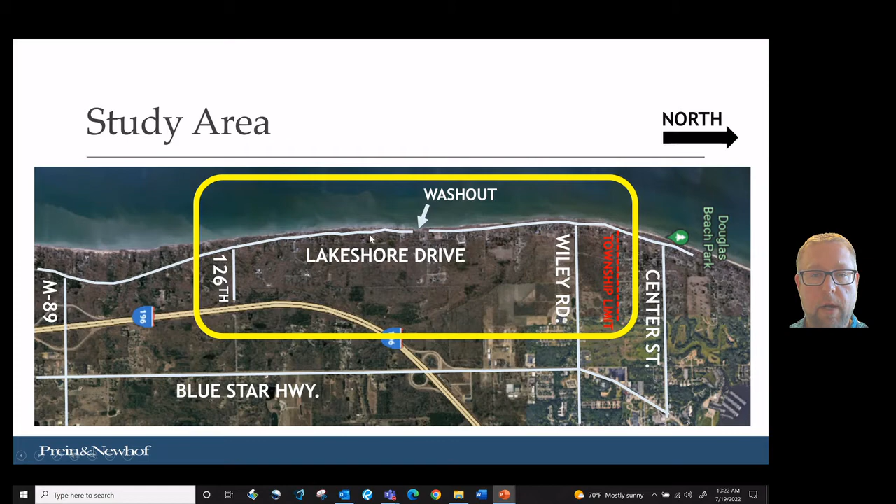This has created a dead-end road in two directions, so folks who access their property from Wiley Road heading south have limited access going in or out. Our study area for this feasibility study goes from the township limit on the north end to 126th Avenue on the south end. It encompasses both sections of dead-end roadway and the area of the 1986 washout.

What to expect today: we're going to give a presentation followed by input opportunities. We're going to go over existing conditions. We've reviewed the bluff face and the location of the road and how close it is to the bluff in several locations, and we're going to present a snapshot of what the roadway and the bluff look like today.

We're going to discuss the risk to the road, the relative risk of a bluff failure impacting the road. We're going to look at some management strategies that the Road Commission can employ to manage long-term access along Lakeshore Drive. We have four options that we're going to focus on and present, and then we're going to ask for input from everyone in a discussion of the trade-offs. A lot of the options we present today have trade-offs that folks will need to consider, and we need everybody's feedback to help guide future decision-making for the roadway.

In terms of a long-term management strategy, where we are today is in the understand the problems and issues and assess the risks phase. There's no proposed project at this point. We need to develop what those alternatives would be, and then the next phase would be to implement those. So today we're focusing on communicating the risks, exploring alternatives, and seeking public input on those alternatives.

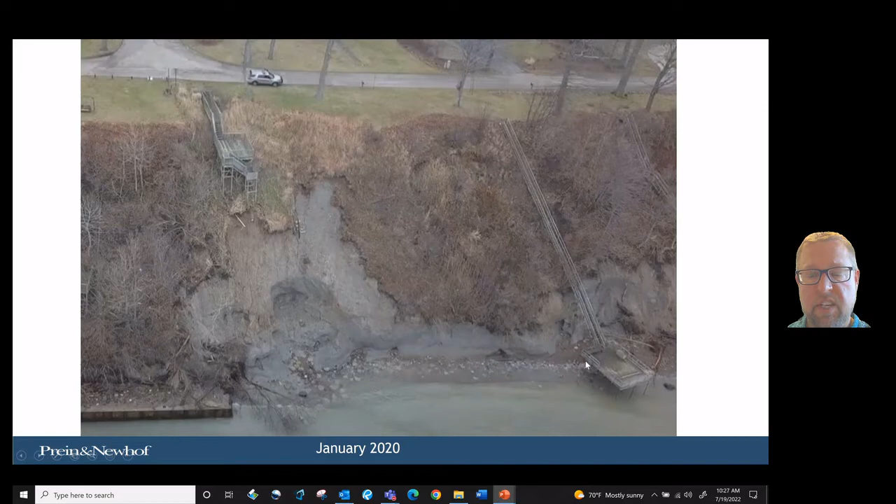So we'd like to talk a minute about coastal dynamics and erosion. First of all, this is a very complex system. The lake levels go up and down and are constantly changing the condition at the toe. When there's extreme wave action, especially in late fall and winter, a lot of erosion can occur at the bottom, or the toe, of the slope. This figure is from an Army Corps of Engineers document called Living on the Coast. It shows a lot of the factors involved with slope stability when infrastructure such as homes or roadways are located on top of a bluff.

The lake level goes up and down, as we know, and we'll show you a historical graph of that in a second. Historically the lake swings about 6 feet in either direction from high to low, and has over the last 100 years of record. Recently there's been a high water period where near-maximum levels were reached, causing a lot of erosion at the toe, as you saw in the previous pictures. In the future, the U.S. Army Corps of Engineers is working on a Great Lakes coastal resiliency study to help understand long-term trends related to lake level change.

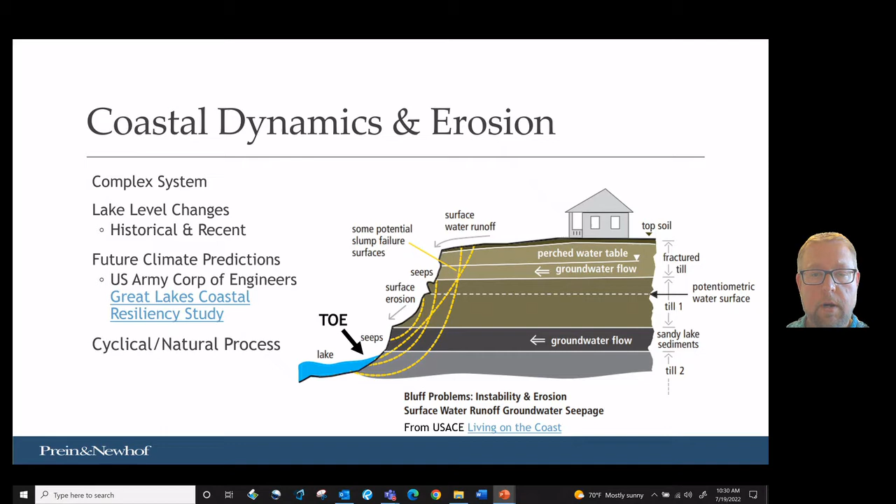These photographs are some examples taken of the bluff in April of this year during our field assessment. They exhibit different types of impacts to the bluff, such as increased erosion at edges of existing structures, upper bluff loss shown happening after the toe has been eroded, areas of groundwater seepage from the bluff, extensive wave damage to the toe, block falls and slumping where large chunks of mass will fall at a time off the bluff, and slides and vegetation loss.

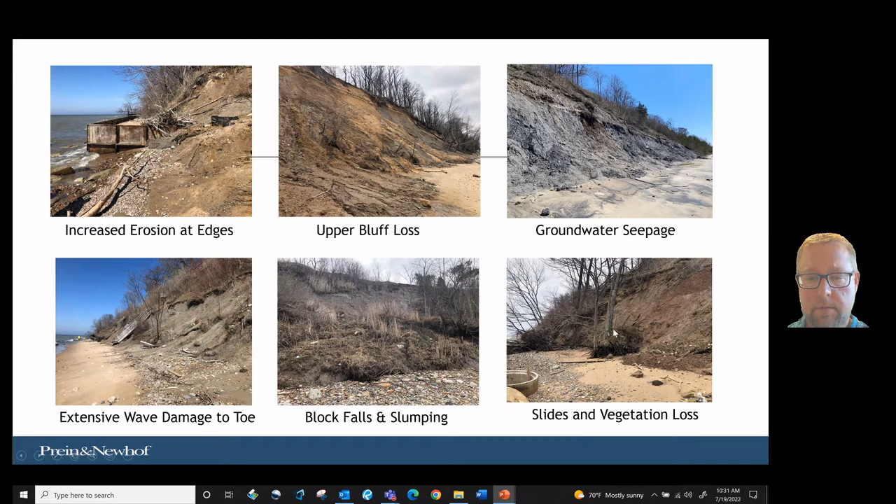Lake Michigan and Lake Huron are connected, and a lot of folks are familiar with this graph. It shows the water level change over time as tracked by the Army Corps of Engineers. This graph was taken from a previous presentation linked on Saugatuck Township's website, and it highlights that there have been rapid changes in short periods of time, and prolonged highs and prolonged low periods over time. So we acknowledge there's a historical change in water levels, but on average, during a given year, the water will change about a foot, but it can very rapidly change from highs to average or down into lows and then rapid highs relatively quickly over a matter of 1 or 2 years.

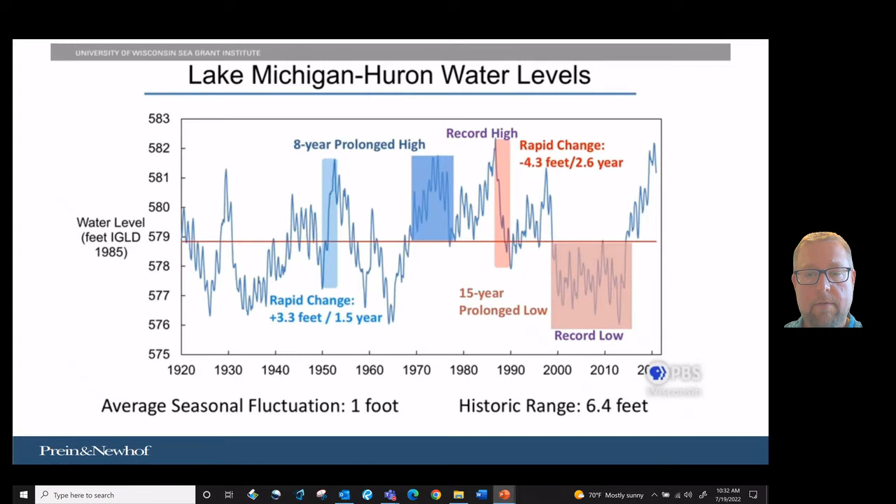The recent low water period lasted approximately 15 years, and the high water period this time was relatively short and is starting to trend down toward average, but we don't know what's going to happen in the years to come.

So let's talk about the roadway itself. Lakeshore Drive sits on top of a 60-foot bluff. We've mentioned it's dead-ended in 2 directions. What does Lakeshore Drive mean to people?

It provides access to homes and businesses. It's a neighborhood feature. When you walk along the roadway or you drive along it, it's just a fixture of the neighborhood. It's a defining characteristic that makes living along and walking along Lakeshore Drive a very unique and majestic experience. It's a community asset for recreation.

There's lots of bikers and joggers, dog walkers, and folks who like to push children in strollers along this road. So it currently acts as a road right-of-way and a public pathway for the community, and it provides a route for critical emergency services such as fire, police, and ambulance.

Also, many people don't think of it this way, but the roadway is a utility corridor. There's public water main down portions of the road, there's gas mains, and there's different communication cables that run within the road right-of-way.

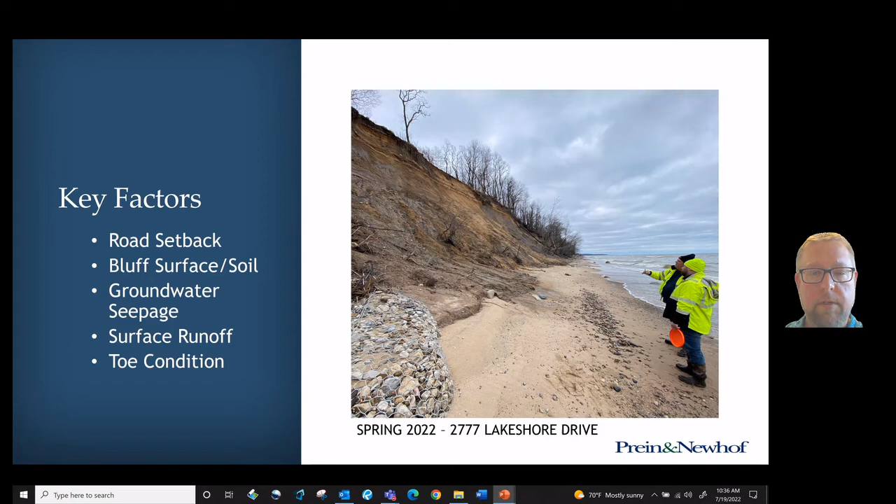When we talk about risk, we grouped it into short-term risks and long-term risks, and we asked how likely is it that a bluff failure will impact the road. Our risk assessment is centered solely along the road; we did not look at structures, only the likelihood of the road being impacted. We grouped these into more likely to be impacted, less likely to be impacted, or just possible that it be impacted.

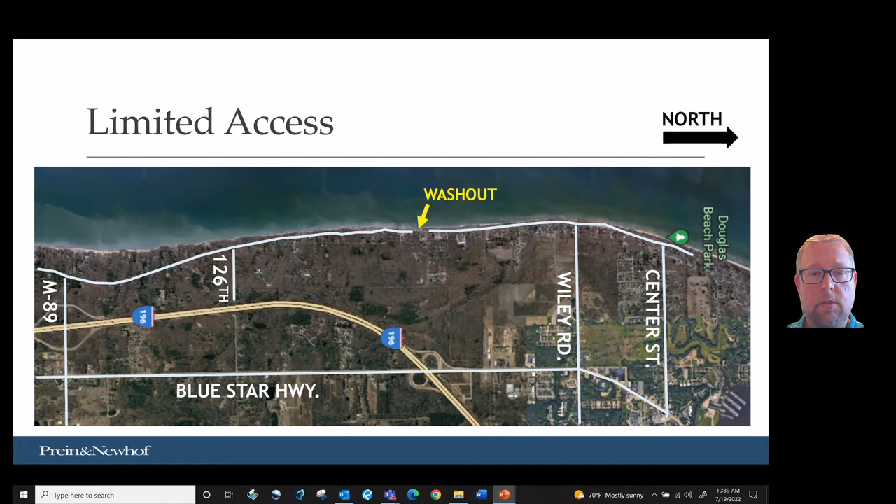We'd like to highlight the limited accessibility along Lakeshore Drive. The road is dead-ended in two directions, and we wanted to highlight the number of parcels affected. From Wiley Road heading south toward the washout, there are approximately 72 parcels that could be affected along this stretch of roadway by a bluff failure impacting the road. From the south, going north from 126th Avenue, there are approximately 115 parcels that could be affected by loss of access. We did not study between 126th and M89 because the setback distance increases greatly along that stretch.

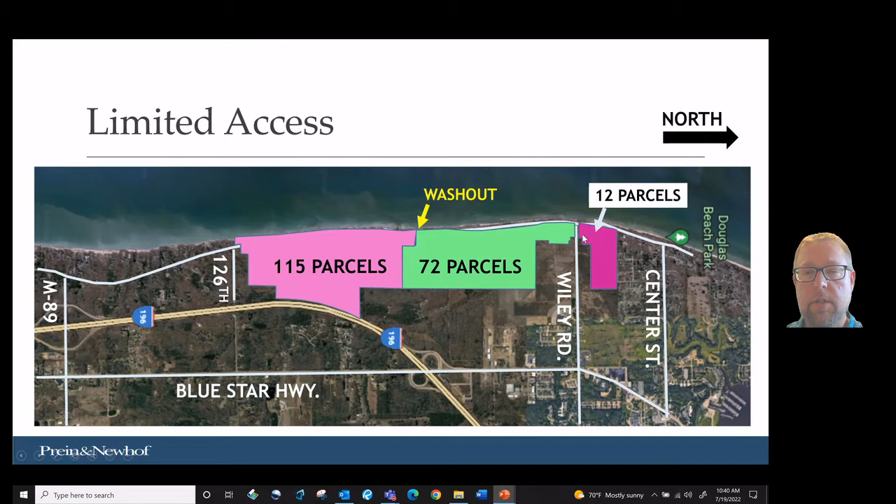We also considered a small area north of Wiley Road. Today there is two-way access either from Wiley Road or Center Street along Lakeshore Drive up to the township limit. There are approximately 12 parcels there, but the road is quite close to the bluff.

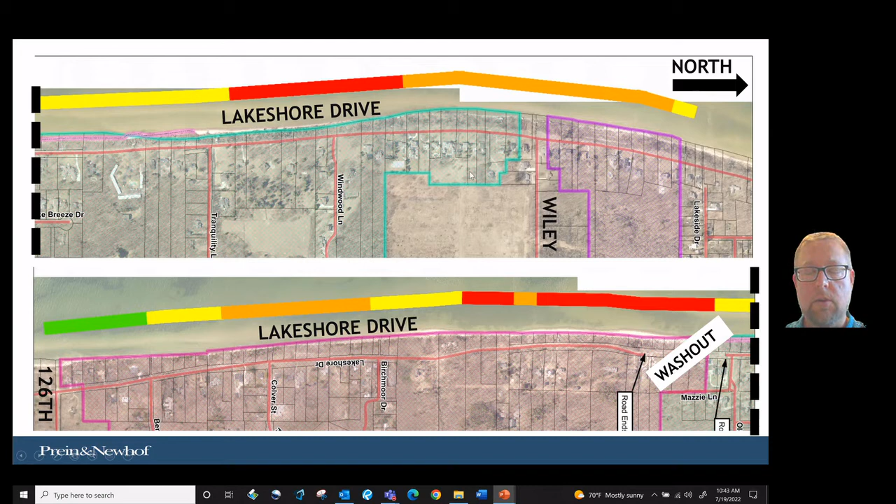The point I'd like to make now is that there are quite a few areas of Lakeshore Drive where in the short term, it is likely that there will be an additional impact to the bluff that could impact the roadway. We don't know exactly where or when this will occur, but there are certainly a lot of areas where it is likely or possible to happen in the short term.

Some important conclusions of the risk assessment. Is the road safe to travel today? Yes, it is. We reviewed the road, and with the current setback distances and the current condition of the bluff, the road is safe to travel today. That being said, the bluff is always changing, so if you see something, please let the road commission, emergency services, or the township know that something has changed along the condition of the bluff, and you would like somebody to come investigate.

The bluff is in an active state of change, and one high water event will damage a lot of the bluff. We saw that with this last high water event—there was significant damage across most of the bluff. Specific areas are more likely to fail before others. Those are indicated in red on the maps, and short-term possible failures are indicated in orange. We cannot fully predict where and when the next loss of access will occur.

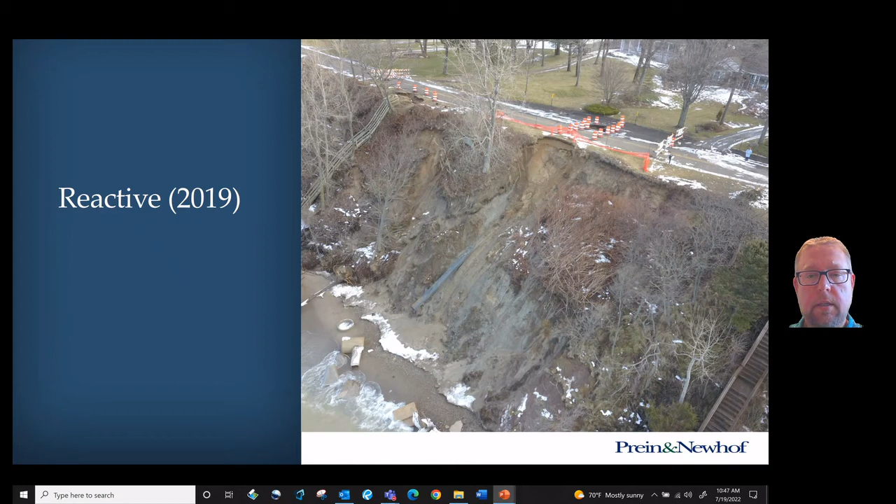We saw this in 2019 when a sinkhole developed in the roadway and there was extensive loss of mass of the bluff. In that case, weight restrictions were put into effect, which also affected emergency services. Ultimately, the road had to be closed for a long period of time, which stranded several residents that lived on the other side of that closure.

The Road Commission worked to shift the road within the road right-of-way for a period of time. Then the Road Commission explored obtaining easements to bump the road over through people's front yards, or to try to relocate the road behind the houses.

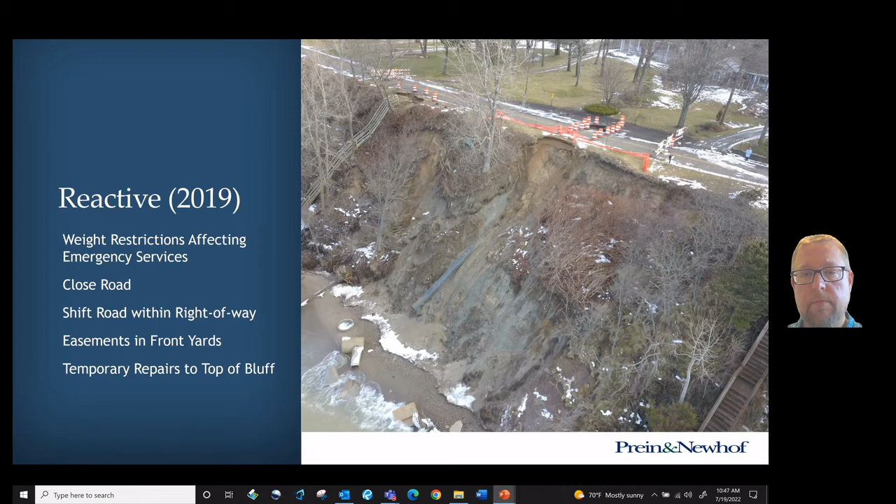Ultimately, the Road Commission came back and did some temporary repairs to the bluff to open it, but there still is no toe protection there today, and this area is vulnerable in the long term to additional road closures and failures. The road was reopened in April of 2021 once those temporary measures were put in place.

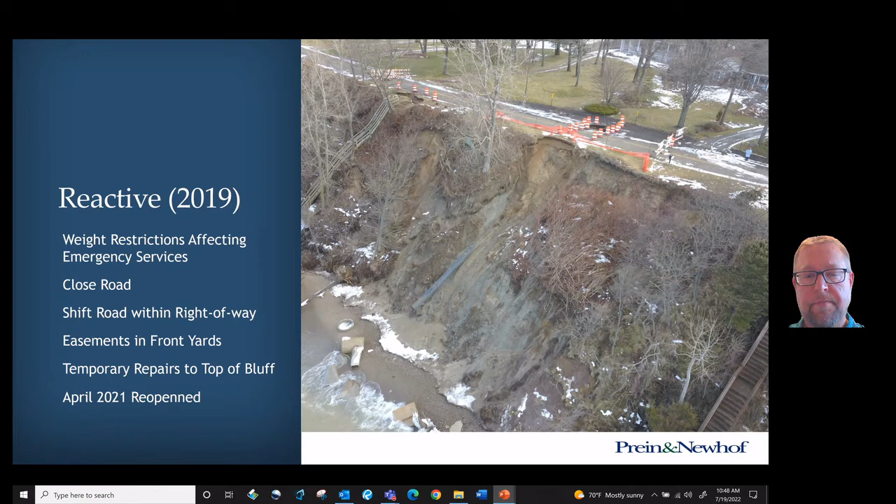The second option we looked at is a reactive option. With every option we have, there are trade-offs. Some of those trade-offs present challenges and some present benefits. We have boards on display today where folks can comment on the various trade-offs and what they think are more important than others.

Some of the challenges with the reactive option: access is uncertain in the short term. It will result in repetitive loss. The road will be closed for months at a time. There's still one-way access from each direction. The Road Commission has a limited jurisdiction to work in. Easements are uncertain when they're needed, and the road will eventually fail beyond repair.

Some of the benefits of this option are that it maintains the current road location - we know, until it doesn't - because we know that this option ultimately is not a good long-term management strategy, since failures are certain to occur.

Property configurations don't change. This means the road stays where it is and no one needs to move a driveway or a septic system to reconfigure how their property accesses the road, because the road stays where it is. Easements are only required as needed, so we don't need to proactively seek out easements - they would be obtained as they're needed.

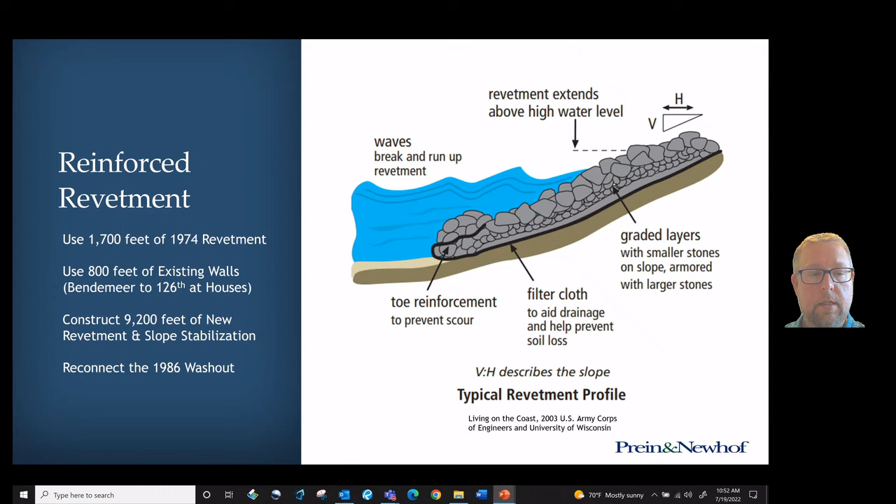Just building a revetment at the toe of what's eroded today is not effective in and of itself, because the bluff will continue its cycle of collapse, and so that could just be buried and the top of the bluff could still recede over time. So building a revetment needs to consider stabilizing the slope behind it and reconnecting the 1986 washout to establish two-way access.

Some of the trade-offs involved with this solution: loss of access is still possible in the long term. Loss of beach is almost certain for private property owners and the public's ability to walk the beach. It will interrupt the natural coastal process. Large structures are known to increase erosion at the ends of their structures.

They're subject to overtopping and require maintenance. Building a large revetment is challenging because it's hard to get public funds to spend on private property. There's a lot of complications that would need to be overcome with how we obtain funding for a high capital cost project like this, to build a revetment on property that's currently private. So there's questions about bluff and beach ownership related to this.

Some of the benefits are that it maintains the current road location, but failures are still possible in the long term. Property configurations don't change, so the road stays where it is and no one needs to move a driveway or septic field. It'll restore two-way access, eliminating the issues with one-way access, and restore a public path option along Lakeshore Drive, where recreational access is currently limited from one direction or the other. Ultimately, this could be an inevitable outcome of the shoreline. We see lots of new private revetment structures and shore stabilizations, walls being built along the bluff to protect private property, so we would like to hear people's opinion about that as well.

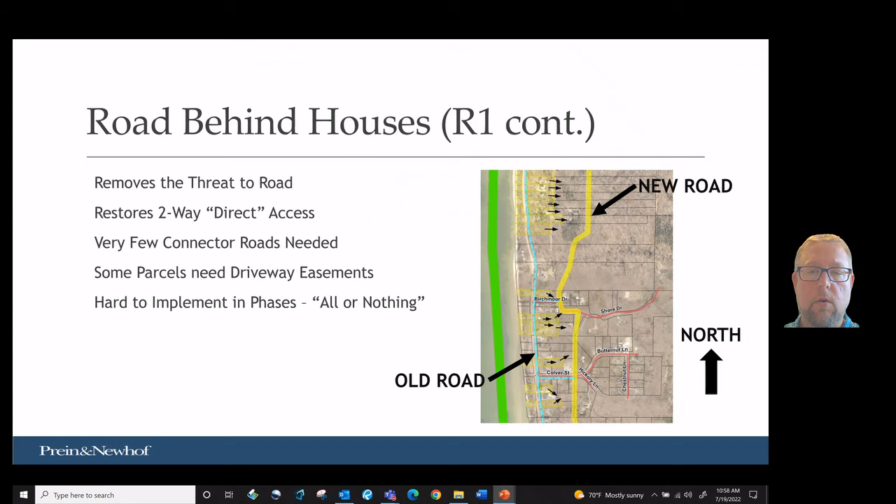This option is being presented because it removes the threat to the roadway entirely. The road is relocated inland, it restores two-way access, and very few connector roads are needed. As mentioned, some parcels will need driveway easements. One of the challenges with this option is that it's hard to implement in phases—getting half of your easements doesn't give you a connected roadway. So to implement this type of alternative, you would need to acquire the majority of the easements to be fairly certain that most people could relocate to the road in the long term.

So challenges and benefits with this option: the road location must change, it's going to be close to houses, there's a lot of property acquisition needed, and each property will need reconfigurations to access the road from a different direction. It has the same challenges of whether public funds can be obtained to fund changes on private property. Some of the benefits are that the loss of access is prevented, there's more direct access, and we don't need additional connector roads. It can restore two-way access to properties, and public path options are available for the old road right-of-way. It maintains the beach and natural shore process for a time, meaning until private structures are built along the shoreline. And the road can ultimately be maintained by the Road Commission, providing a reliable corridor for utilities.

The last option we want to present is the second resilient option. It's basically similar to the first option, but moves the road even further back. This would put the road further from the homes and require a lot of connector roads.

Each property would still need to reconfigure itself to access the roadway, and a lot of new road right-of-way would need to be acquired. However, this approach could be implemented more easily in phases, and it could ultimately restore two-way access. It removes the threat of coastal erosion from the roadway by managing the retreat of the road over time.

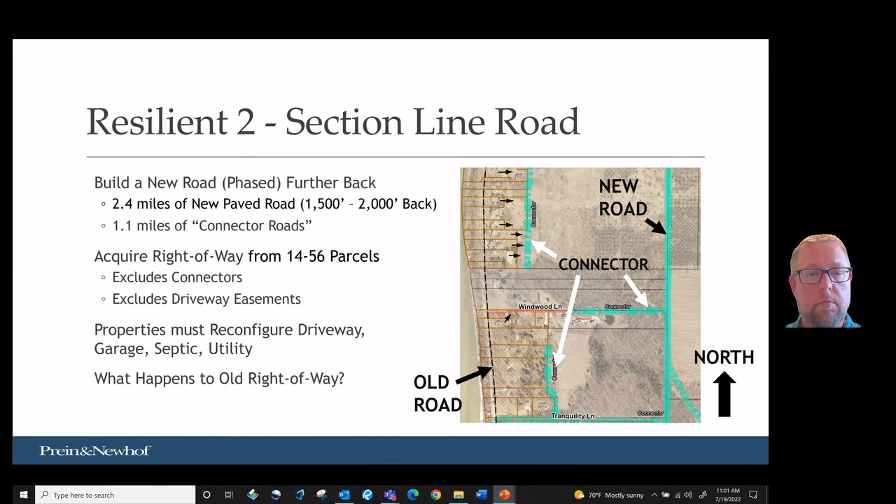Properties still need to be reconfigured, and there's still the question of what happens to the old road right-of-way. One example is it could be turned over to private property owners, or converted into some type of public pathway until the bluff and slope are no longer stable enough to maintain that. We call this option the section line road.

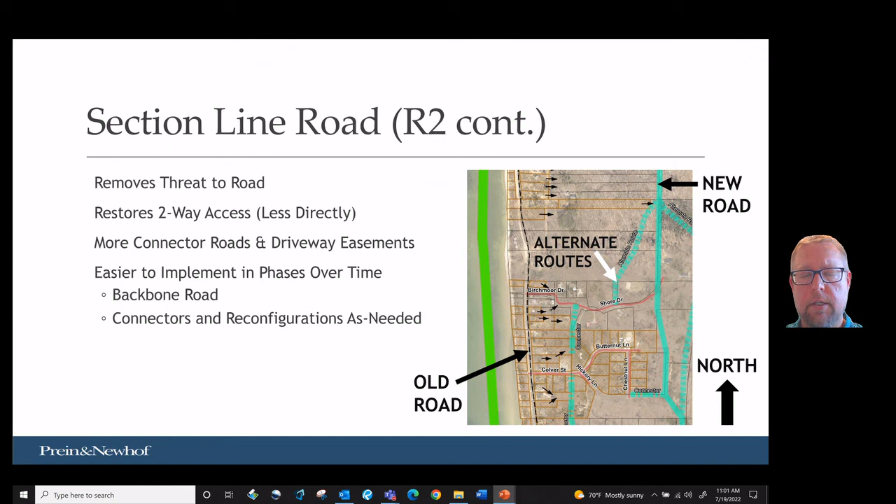Again, it removes the threat to the road entirely by moving it inland. It restores two-way access, although less directly than the previous option, and there are more connector roads and driveway easements that would be needed over time. But one advantage is it's easier to implement in phases, where the new initial road could be built as a backbone, and connectors and reconfigurations could be made more easily over time.

Some of the challenges we've highlighted: the road location must change. It's not as close to the houses, but still requires a lot of property to be acquired to build it. There's more indirect access needed, property acquisition as mentioned, and configurations of each property need to change. We have the same challenges of funding acquisition.

Some of the benefits: the loss of access is prevented. It can be easily done in phases, giving several options once the initial road is constructed. It would restore two-way access. There are path options available for the old road right-of-way. It maintains the beach and natural shore process for a time, and it can be maintained by the Road Commission long-term as a reliable corridor for utilities.

After we collect feedback from everyone, we're going to work to conclude the feasibility study portion of this project by exploring funding options and further evaluating the feasibility of the options presented. If there are other options you'd like us to consider, please fill out a comment card. It will be some time before an alternative is selected, and even longer before any construction could occur, so there will be additional opportunities for public input when further direction is chosen.